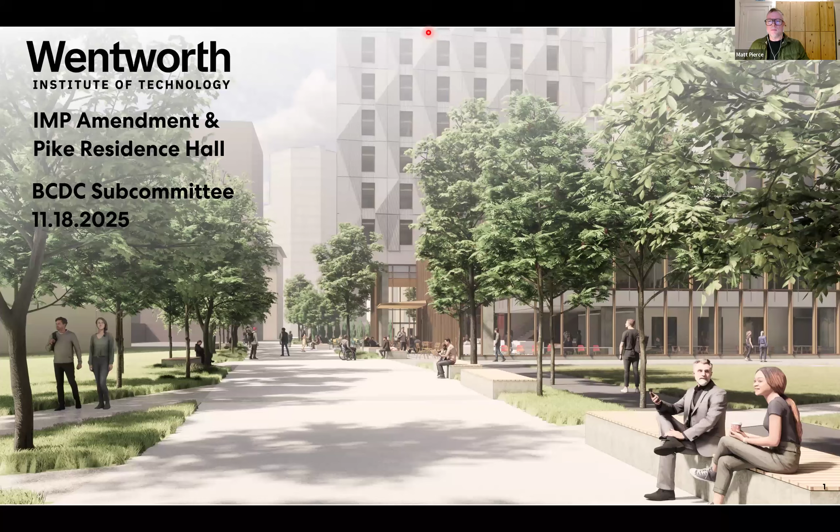Okay, thank you. Let me just pull up my screen here. Okay, everybody see this screen okay? Yes. Great. Well, thank you all for giving us your time this evening.

We're really excited to share some progress that we've made since the last time we met with some of you. I think we've been able to incorporate a lot of the discussion we had last time that was really fruitful, and I think has led to some good development in the project.

A brief overview of things we're going to touch on tonight. We'll start off with a little overview of the feedback from both BCDC and the planning staff to date and how we're responding. We also want to touch a little bit about overarchingly, what makes some of the things we're doing and proposing unique to Wentworth. We're also moving from a lot of diagrammatic massing views and overarching macro scale things into a lot more detail now. So we'll be focusing a lot more this evening on architecture and materials.

And I think to the progression of the presentation, there starts to become a little bit of a blend between some of the kind of IMP scale issues and then the specific development of the Pike Residence Hall and the associated landscape, which is a big part of the IMP amendment.

When we get to the landscape, we'll be talking about embracing the solar conditions within specifically the Western open space, and how we've evolved that design to be more flexible, also to be more coherent and simple in creating a singular gesture, creating a magnet for people in the West Courtyard. And again, really thinking about how what we are proposing is reflective of Wentworth and its unique culture.

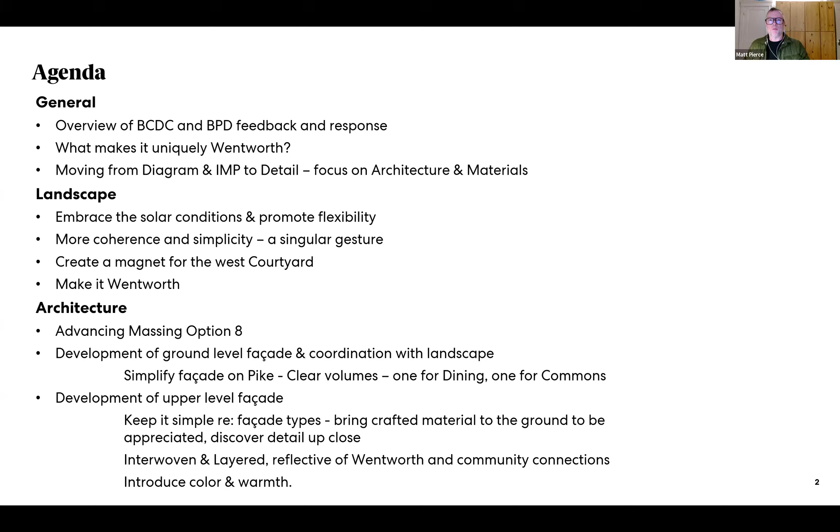So just some overview of feedback and discussion that we had at the last subcommittee meeting. I think in general, most commissioners were supportive of the massing direction we were moving in with option 8 and the site planning.

There was the bulk of the discussion around how to take the open space specifically on the west side of the building between the Pike Residence Hall and the Treehouse, and make that the best it can be as an open space going forward.

There were some questioning of the massing, mostly from Commissioner Lubenow and Commissioner Eastley to some degree. Commissioner Lubenow had asked if there were other options considered. Last time we showed a range of studies in the massing that were in a very narrow band of refinement, so we've got a little bit of additional context on that.

Commissioner Eastley had some questions about the cantilever of the building and the way the Pike facade steps in plan and the way that it met the Pike, that we will address.

She also had a comment about maybe calibrating the placement of trees to where there is more sun based on the shadows of the buildings, and maybe locating trees in places that will be shady as a result of those shadows, and that's something we have addressed.

Commissioner Manfredi had some questions around wind mitigation, specifically around the northeast corner of the building, which we'll talk about.

There was a lot of discussion around the character of that west open space, and I think it was a really rich conversation around how to be responsive to where the sun will be, where the shade will be based on the buildings. Could we be more creative in how we address that? Maybe that means less plants, maybe less natural landscape. And could it be fun? Also, could there be color within the landscape and within the building?

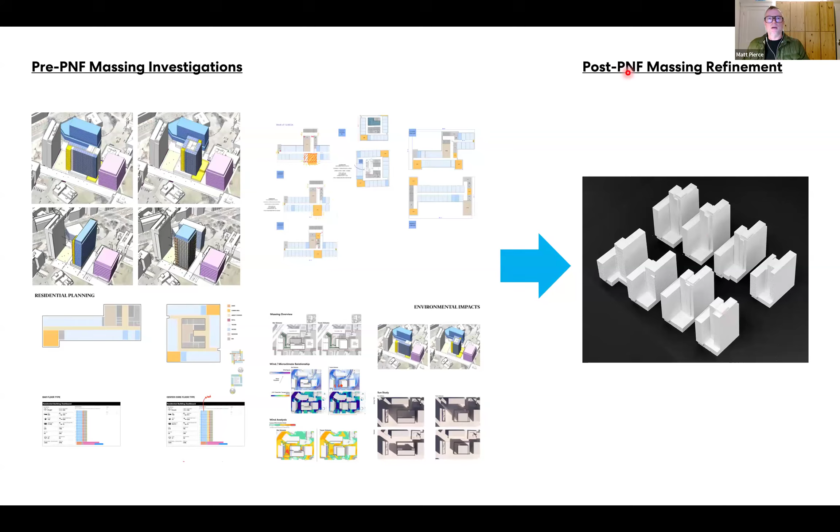What we shared with the commissioners present last time was the very detailed calibration of the massing that we did with planning staff between the first and second BCDC subcommittee meetings, which focused on trying to shorten the length of the building overall north to south, but also increase the difference in height between the offset bars. That was something we shared with the committee last time.

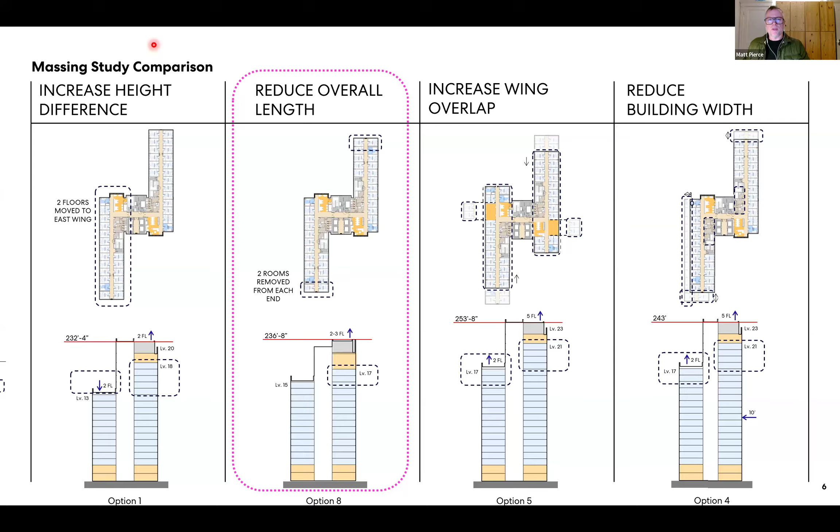This is a section and plan comparison of what was proposed in the PNF versus option 8 that we've been moving forward with, which adds some height to the eastern wing of the building, creating more hierarchy between those two pieces of the massing, and also shortens the building overall from north to south, which had good site impacts, opening up more ground plane on the north end of the building and potential for wind mitigation. So there were a lot of advantages to that.

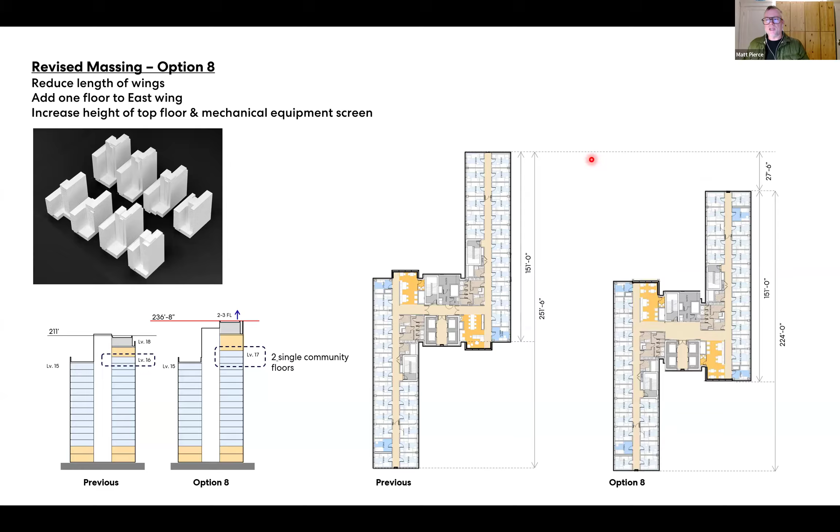That got us to this basic massing, which includes in the center the Pike Residence Hall with two bars that slide relative to one another in plan, with the easternmost bar being taller, increasing that height difference between them. The mass of the Huntington Academic Building has a lower mass aligned with Huntington Avenue, and then the upper mass of the building sets back, respecting the Avenue of the Arts guidelines.

This is also one way that massing could be realized in that future PIP project. Over to the right is the residence hall that would be on the center quad, and a couple other views looking northeast and northwest.

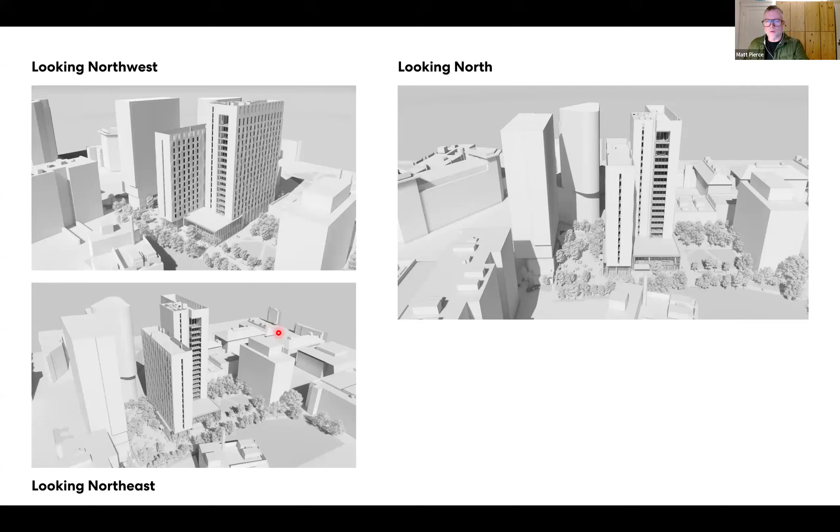So to talk about the development of the open space, I'll hand it over to Anthony and Mish.

Thank you, Matt. I'm going to walk through the open space adjustments we made to planning for the IMP amendment, and then we'll pass it on to Michelle Crawley to walk through the near-term landscape associated with the ADB Pike Residence Hall project.

There were some really wonderful comments, and I think it helped us unlock the significant potential for this to be a space of real significance, in the realm of landscape and campus planning in the city of Boston.

We think these 4 themes broadly represent the feedback from our last subcommittee meeting. There has been and continues to be significant discussion about the challenging environmental conditions in the west open space, particularly the limited sunlight in the northern portion and the anticipated northwest and southwest winds that can at times create an uncomfortable outdoor environment.

There was a really poignant comment from Commissioner Kim to try and create more coherence. She suggested a singular gesture, and Commissioner Garland encouraged us to develop a language for open space. Last, there was a lot of discussion about the open space having to do with creating interest and a sort of visual magnet.

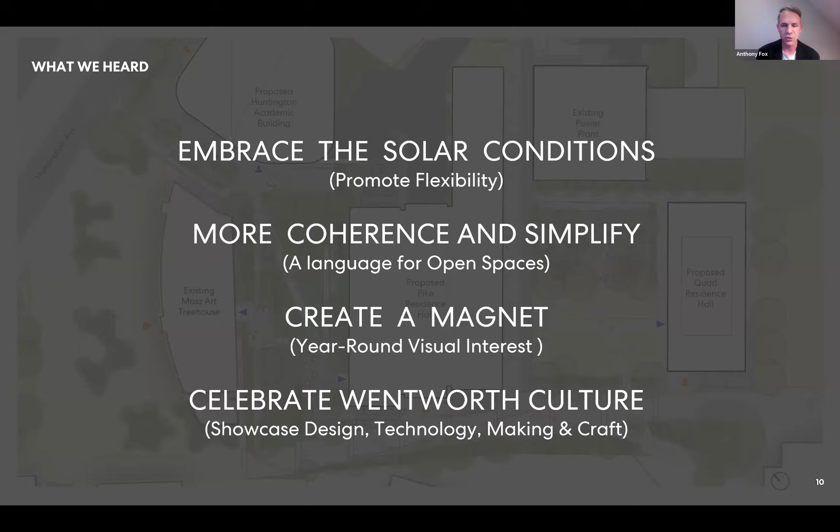The space is so interesting that it will draw people despite the shady conditions. And last, there was a desire for us to explore what can make this uniquely Wentworth, to celebrate the culture of craft, of art, and of making.

Commissioner Garland suggested that we again create this language of open spaces, and then Commissioner Eastley mentioned her recent trip to Rice, which has these compelling rooms held together with these incredible, memorable promenades.

In the meeting, I think we immediately were thinking about the West and Central Quads, which are these 3 distinct outdoor rooms that are within a language, but are spatially quite different.

This was an evolution that started with Stu Dawson and Sasaki, creating an open plaza in the 90s. That open square was translated into an idea for what is now a very iconic pavilion by Thomas Phifer with OJB, and then more recently with the evocative Sky Space by James Turrell. Together, they really create this wonderful, cohesive language of open space that is quite complementary to one another.

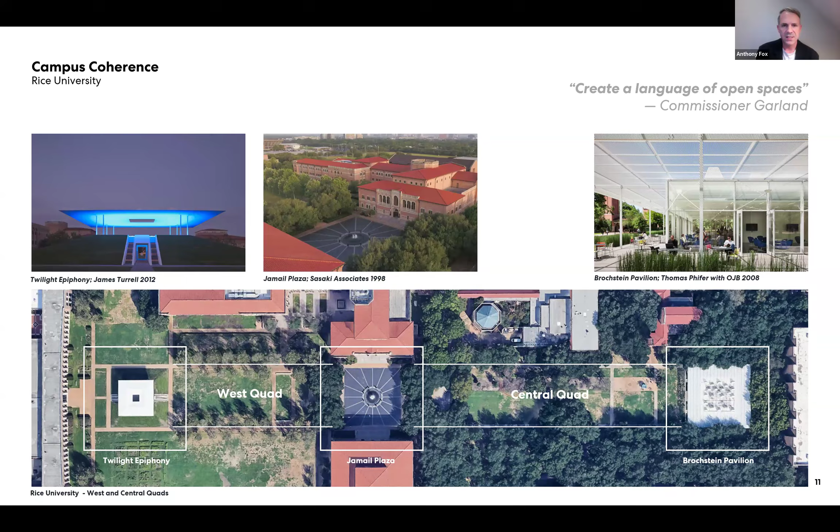And so we started to think about how we could begin to envision something like this for Wentworth, a series of open spaces that have similar spatial intentions, but take on complementary forms.

Then Commissioner Eastley made this really powerful suggestion for the tree canopy to follow the arc of the sun, which we thought was a great comment, because we have the opportunity for sun in the southern pockets of these spaces, so why not embrace that?

So we've moved trees in the southern portion of the spaces to allow sun to pour in as long as possible, and then we shifted the trees to the north side that's inherently a shady condition. This led us to an idea about trees shaping space, a grove on one end and a glade on the other.

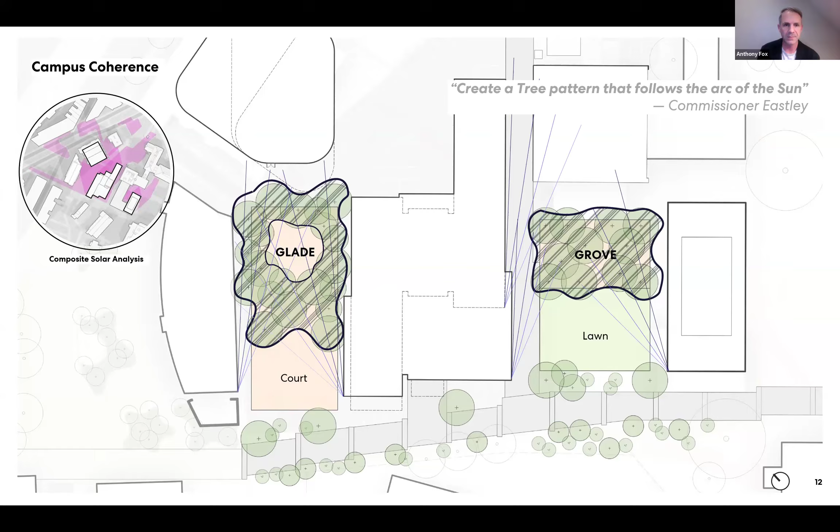In the east open space, the grove could act as an outdoor room, anchoring the north side of an open lawn. And at the western open space, we're really interested in an informal grove that opens up in the center, creating a kind of glade that marks a room open to the sky.

We've also been looking a lot at shade, and in response to the concerns about plant viability in these shaded conditions, we've looked closely at 2 precedent landscapes in New York that successfully embrace similarly challenging solar conditions. These are images of Teardrop Park, which Michael Van Valkenburgh referred to as having tremendous shade.

The space has a lawn, but even with the help of 3 mechanical heliostats to throw light into the courtyard, the lawn area only gets about 3.5 to 4 hours of direct sunlight, and the remainder of the park gets less than 3 hours of direct sunlight. And yet the plants are thriving.

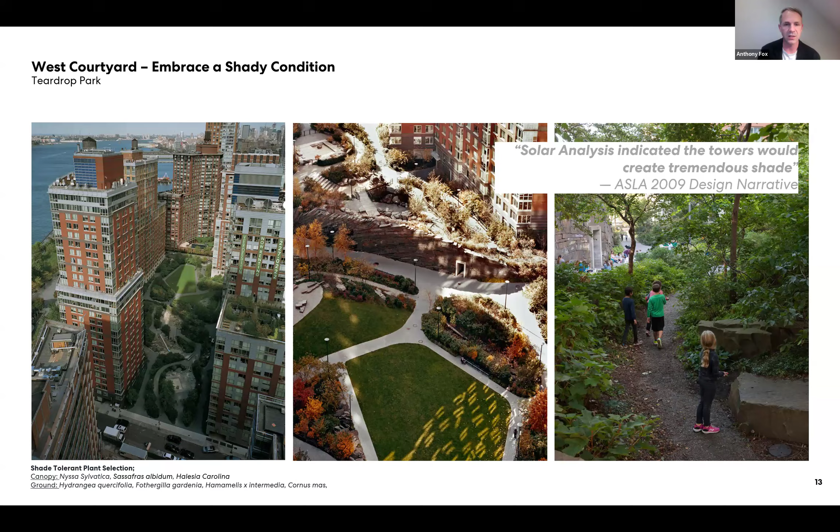So we've been looking really closely at plant selection, largely based on plants that grow naturally in deep woodland settings, like Nyssa, sassafras, Halesia, Fothergilla. I think there's a real opportunity for us to create a planted condition that can thrive.

Here again, a similar condition is the woodland flyover section of the High Line that receives less than 3.5 hours of direct sunlight. They relied on a beautifully curated palette of woodland plants, somewhat uncommon for an urban setting, including an understory of ferns, aronia, viburnum, beneath a canopy of birch, redbud, and magnolia. Together, these subcanopy woodland species really thrive in shaded conditions and create a rich, layered planting experience.

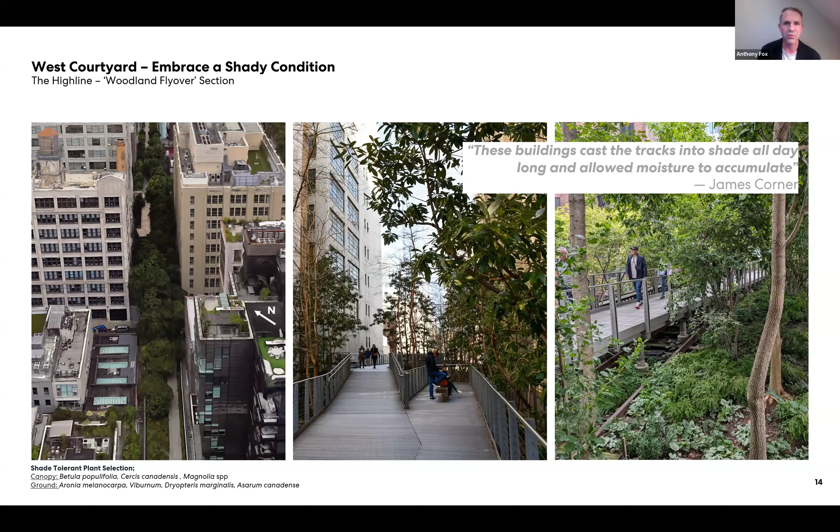So we really think that with a carefully selected palette of plants, we have confidence that both the trees and the ground plane plants can thrive in the shady conditions.

We've also looked a lot at wind mitigation. We're proposing a series of linear evergreen hedges at the north and south ends to help block the westerly winds that we know are going to be quite dominant here, along with marcescent tree species with an overhead canopy that will hold their leaves through the winter.

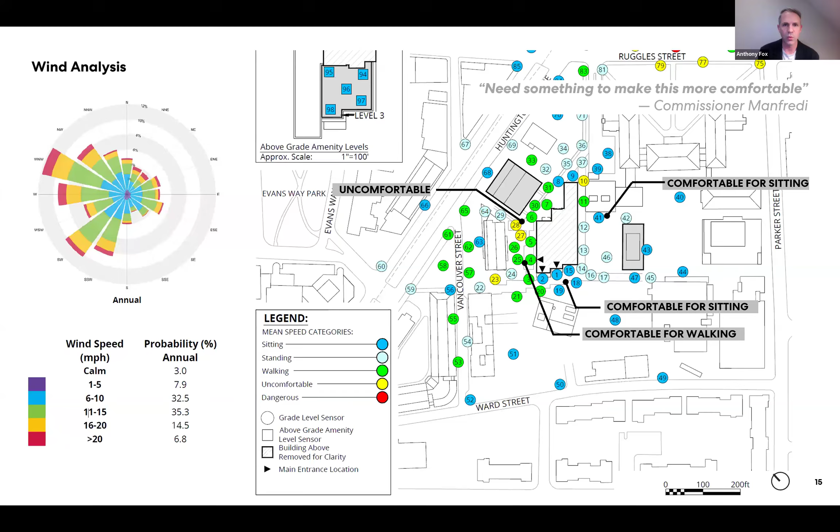While our wind consultants, RWDI, are still in the process of actually modeling, RWDI has updated their report to note that the tall hedges are expected to help reduce the intensity of accelerating winds, particularly from the west and southwest. We're anticipating this change will really aid in creating a more comfortable space for gathering.

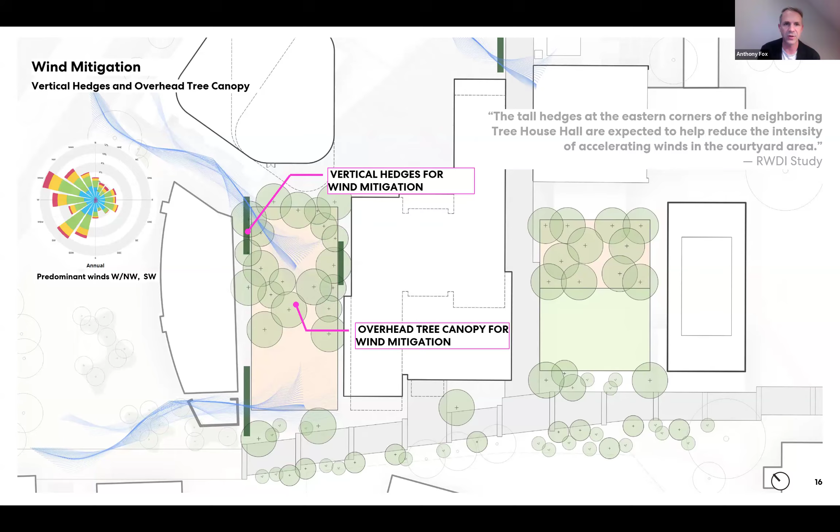We've also thought a lot about Commissioner Kim's comment to create a more coherent, perhaps a singular gesture. In working with planning staff, we've also recognized that this western open space is not a very large area, and that the multiple pedestrian paths to connect desire lines were sort of chopping the space up.

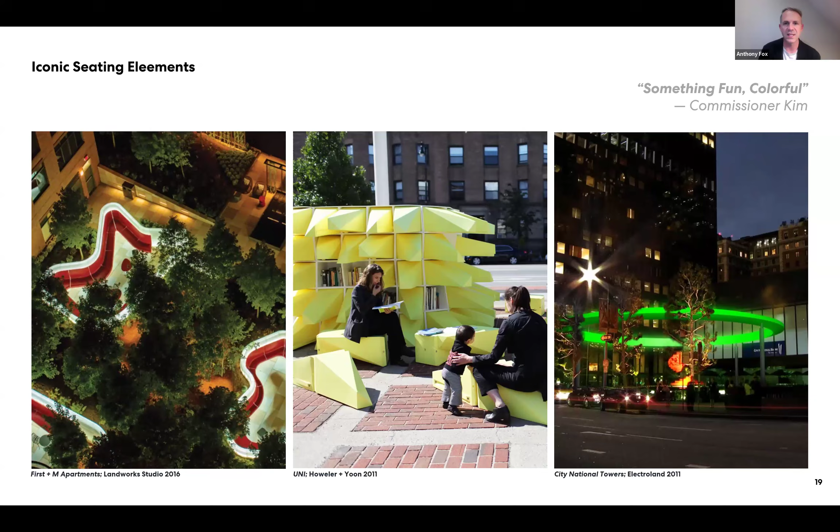There was also a comment about overhead canopies, and again this desire for a singular gesture. We think that creating a large, iconic circular seating area could help create this visual magnet and help shape a secondary space within the western courtyard.

Last, we've also been thinking a lot about the culture of Wentworth and its legacy and identity around craft and making. We've talked to faculty, and we see a real opportunity to use the open space as a platform for making and the display of student-led projects.

From temporary pavilions to construction mock-ups, there's a real opportunity to put the kind of academic learning on display and for students to take ownership of their space. This is their backyard, and with admissions as part of the building program, it's also, in many ways, a front door, an opportunity for first impressions about the culture of Wentworth.

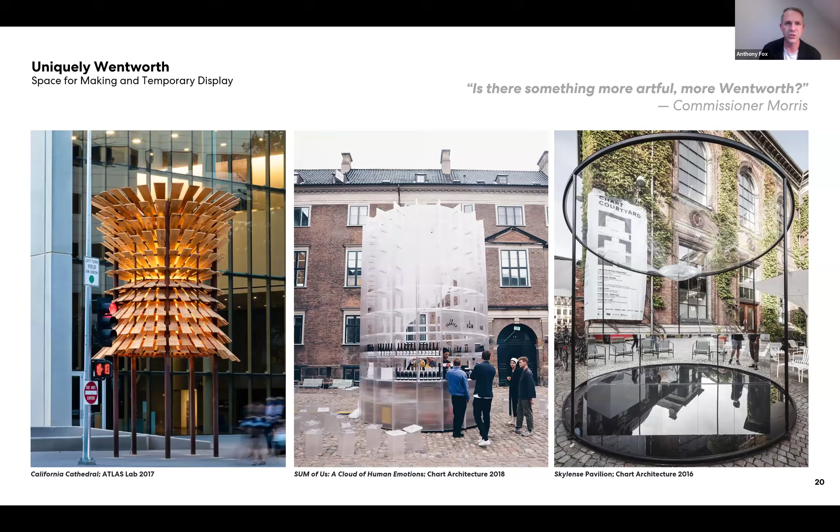In response to comments, we adjusted sidewalks, adding additional sidewalks to follow pedestrian desire lines. We added a new terrace outside of Mass Art to allow for more connectivity and engagement with Mass Art, and we shifted social terraces south to capture more sunlight.

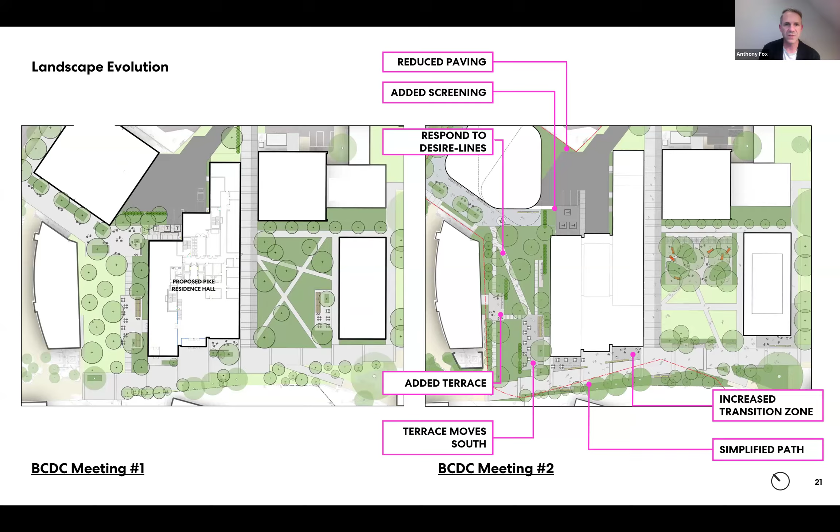After the feedback from the last meeting, we made a number of really big adjustments and have completely redesigned the West open space entirely. We're really excited to reposition the idea from a garden to a courtyard that is flexible, active, and vibrant year-round.

We'll enlarge this plan shortly, but broadly in the proposed changes, we proposed the south ends of the open spaces be open to the sun, and in the west open space created a broad, flexible stone dust surface that allows for more seating and more free choice to move chairs and tables around.

You can also see we've adjusted the building massing, which Matt will go through in more detail, to address comments about the shear wall and to more directly connect and engage the east and west directions. Along the pike, we've calibrated the active seating areas to create what we think will be a really comfortable space, while shifting the building massing so there's a more optimized relationship to the pike.

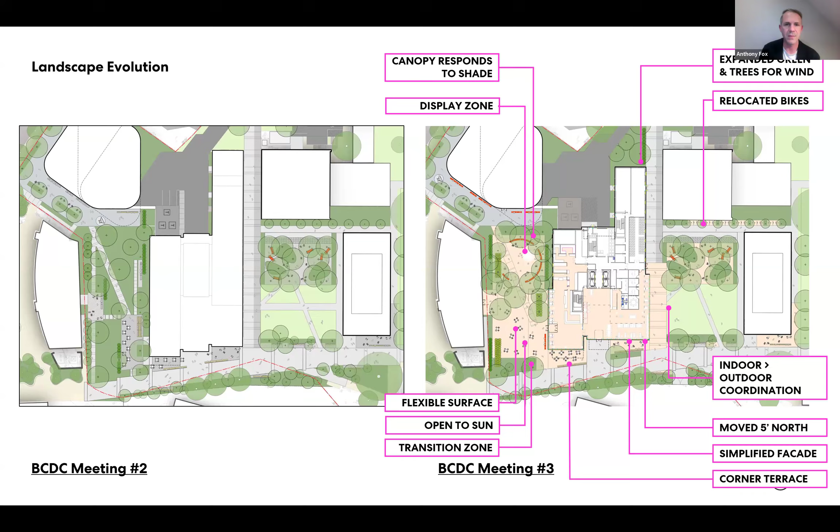Last, to the north, we've reduced the amount of pavement and expanded planting areas. Zooming out, we've also refined the northern portion of the project area, reducing pavement, expanding planting and tree canopy, and adjusting the path geometry to create clear, more direct circulation.

Zooming back in for a little more detail, we want to highlight the updates to the building massing, which Matt will walk through. We've focused on reshaping the ground floor to create greater visual porosity and stronger physical connections to both the east and west open spaces, significantly improving the relationship between indoors and outdoors.

We've also simplified the south facade at ground level while maintaining active seating areas that engage directly with the pike. You'll also notice we've completely re-envisioned the western open space to create a more cohesive environment, one that emphasizes flexibility, framed with this large stone dust surface and shade-tolerant perennial plantings.

At the northern end of that west courtyard, we're envisioning a loose, informal grove of trees that opens at its center to create a welcoming clearing, framed by a concept for a substantial circular bench that both activates the glade and defines its edges. We see this as an ideal location for displaying student-led work, bringing energy and creativity directly into the heart of the landscape.

Last, to the east, we're excited about the opportunity to create a complementary open space that is larger, sunnier, and defined by a broad open lawn for informal activity, anchored by a social grove to the north. As we shared at the last meeting, this eastern space has the potential to support a really wide range of programming, from quiet study to performances that spill out onto the lawn, accommodating a full range of student life activities.

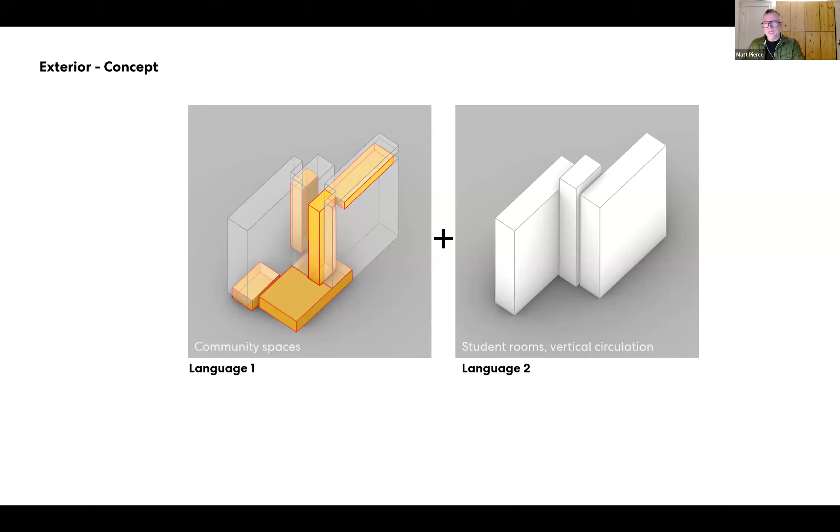There are fundamentally two different building material languages. The orange represents the very transparent student common spaces, and the white on the right are the more solid student rooms. Just to keep it in context, this is going to be a passive house building.

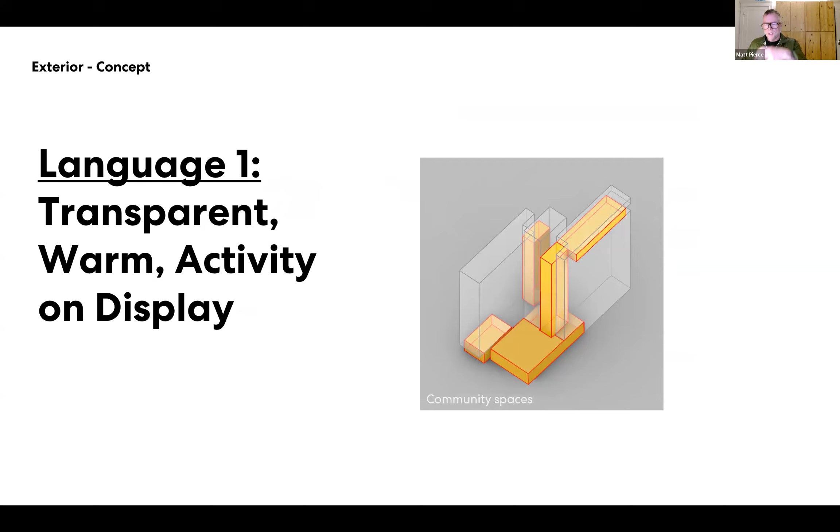That really informs a lot of the approaches we take to how we detail the envelope and the way the building pushes in and pushes out. So those common spaces are really about transmitting the warmth of the interior to the exterior, and then cladding the residential volumes with a facade that's reflective of the community makeup, but also the sculptural and finely crafted nature of concrete.

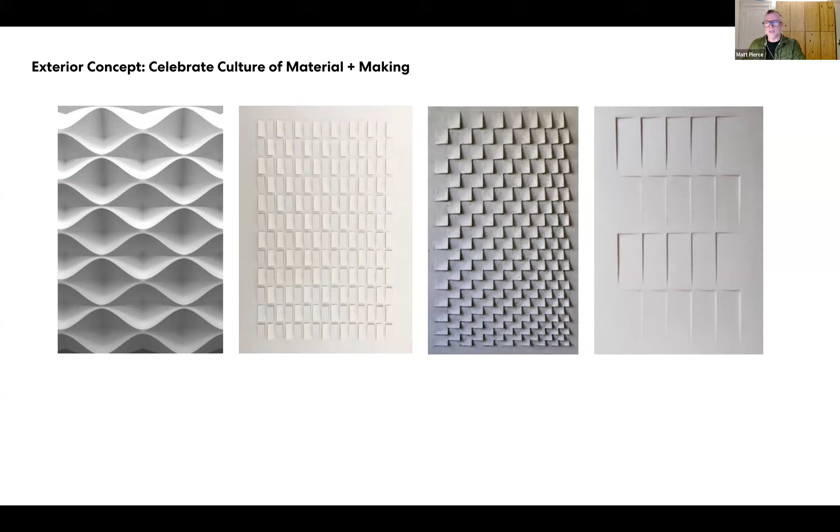So we've been looking a lot at how to incorporate different types of relief that could be really dynamic and responsive to the sun moving around the sky, and create a really dynamic presence on the skyline.

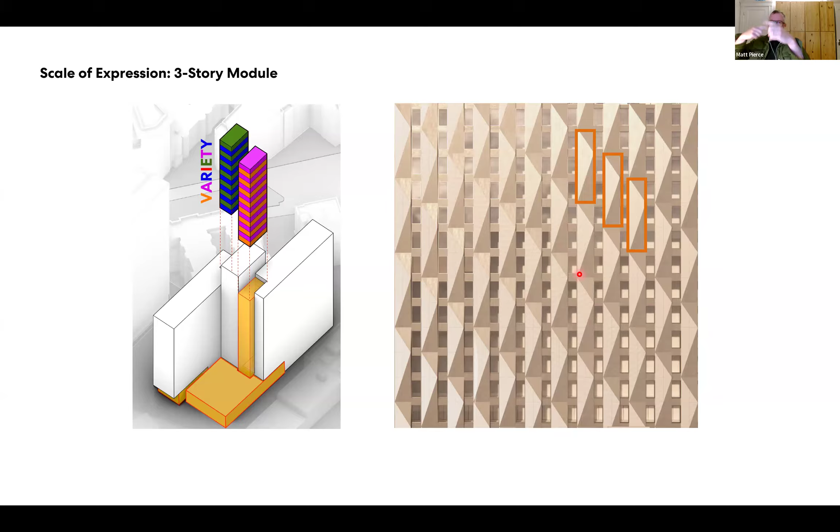Again, reflecting this idea of the alternating types of social spaces in the building that induce a sort of movement up and down to create different scales of community connections, and how that is reflected in the exterior facade in a sort of interwoven, continually overlapping vertical connection between the floors.

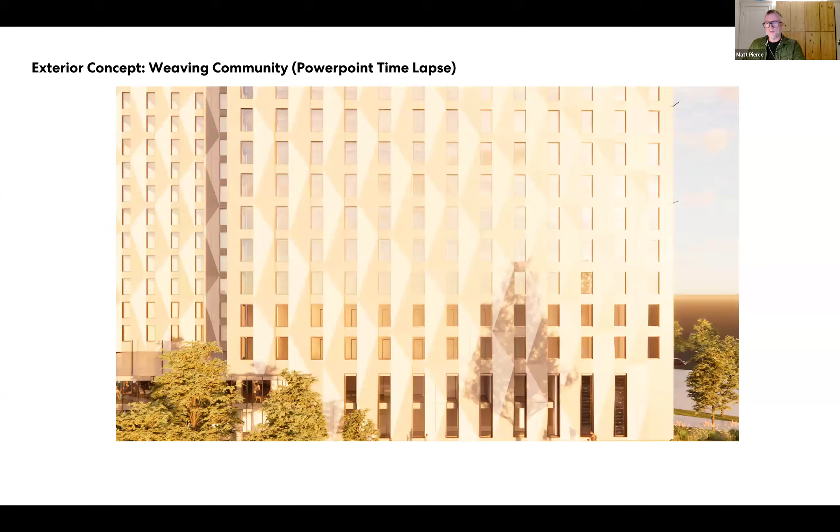If we can get this to play here... there we go. An animation just kind of looking again at the way the relief in the building can be responsive to the movement of the sun and shadows, and create a really sophisticated but dynamic facade.

Some references, on the left-hand side, to the campus buildings CEIS and Beatty Hall, and some examples of what we're looking at in a narrow band of concrete tone, all in the very light end of the spectrum. There are a couple local buildings here: Stuart Street, being relatively recent, a very light, slightly warm toned concrete, and Hult Hall at Cambridge Crossing, the EF Residence Hall, which also has a nice, very light gray tone to it.

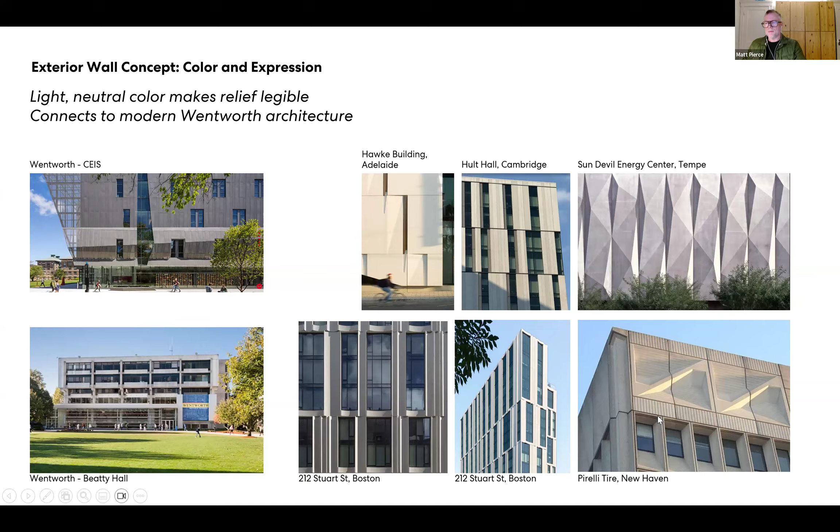There's also this Australian building that we quite like, which has a very delicate textural faceting to it, and also a warmth to the color. And of course, many are familiar with the Pirelli tire building, which has a very sculptural texture to it as well.

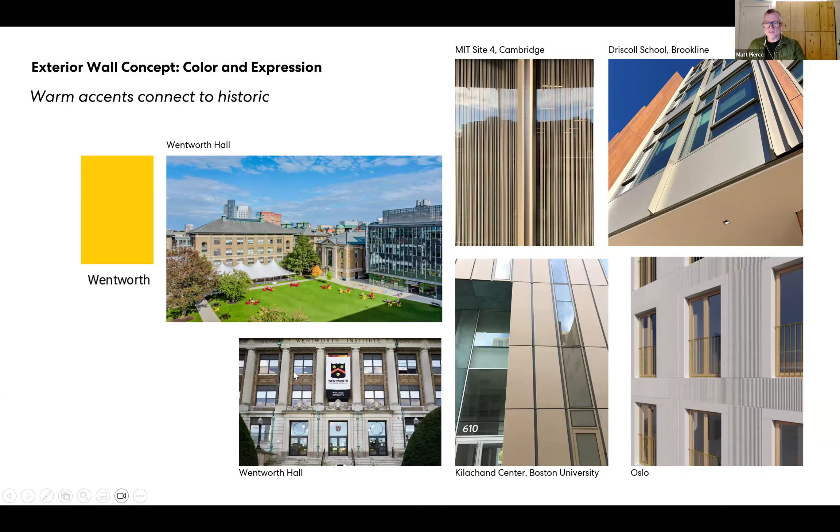But also, talking with planning staff about introducing some color and warmth into the building, and really looking at how that could be a secondary element that takes the warmth of the interior and brings it to the exterior a bit. It also ties in with some of the historic buildings, with their warm toned brick and these more sculptural detail elements within the historic buildings.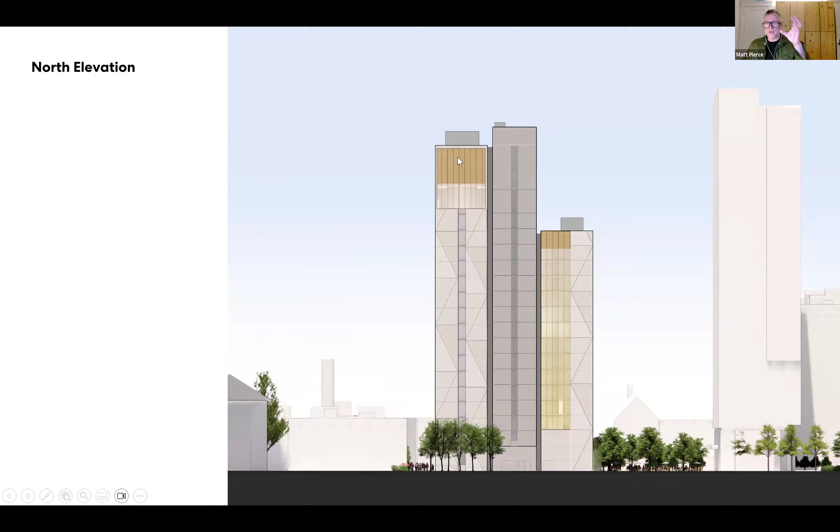The north-facing facade culminates at the top of the taller tower on the east side, with a special student commons and multifunction space that accentuates the top of the building. Then coming back around to the side of the building facing the treehouse and courtyard, that wing is lower in respect to that open space.

Zooming in on the typical module of the precast facade, we tried to make the windows of the rooms as large as possible within the passive house design factors, while also creating textural contrast and three-dimensional relief in the panels, without making them too thick, to keep the volume of concrete on the lower end with respect to embodied carbon.

This is an elevation looking at the north-south connector between Ruggles and the Pike. On the left-hand side is the two-story commons and admission space that's very transparent, looking out to that future east open space. Moving to the right, the ground floor has the bike room, and the second floor has resident director apartments in those windows.

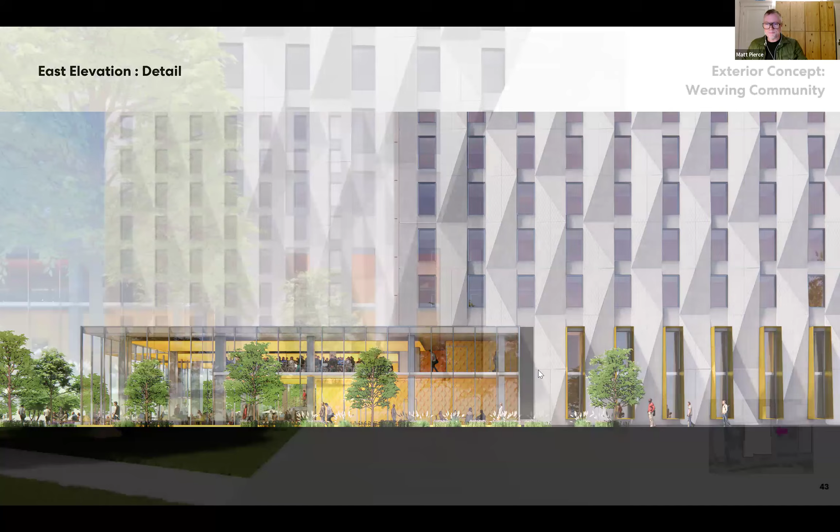As we look at how that material comes to the ground, we want to make this a beautiful textural element, something appreciated at the macro level on the skyline of the city, but also something tactile that people can walk up to and experience, discovering a greater level of detail that might be surprising up close.

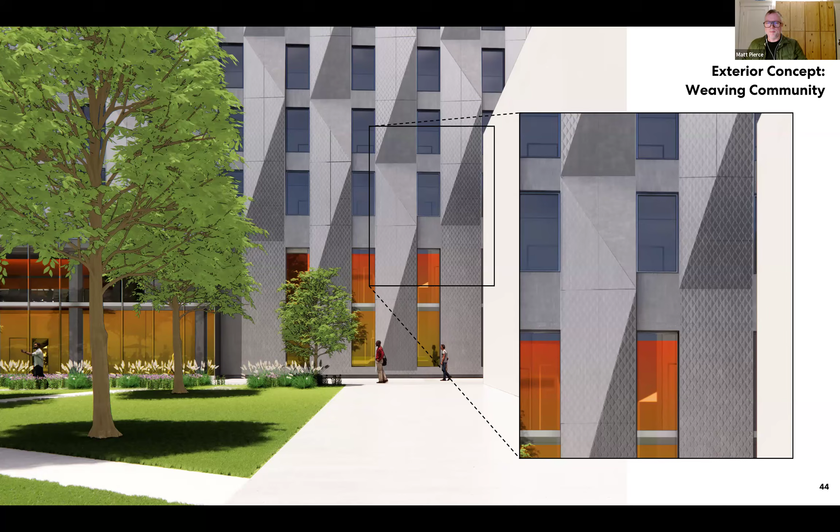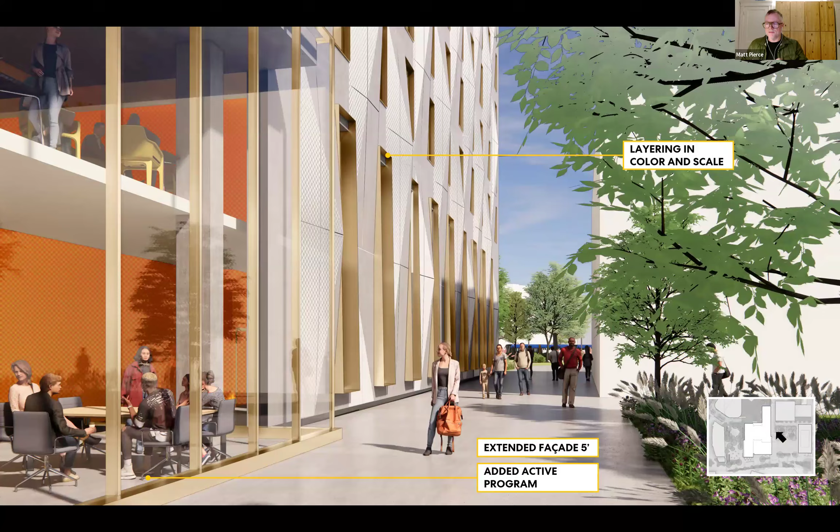Last time, many comments were based on the kind of graphics we had, which were really massing-based and diagrammatic. Now we're moving on to much more illustrative, hopefully immersive and experiential views to really communicate both the building architecture and the landscape that Anthony and Mish have talked about.

This is a view of the north-south connector looking north towards Ruggles Street. We're looking at a metallic color incorporated into the curtain wall and into the liners and jamb projections of the first and second floor on the east and west sides, as a way of interweaving with the greater theme of the building, weaving those materials together.

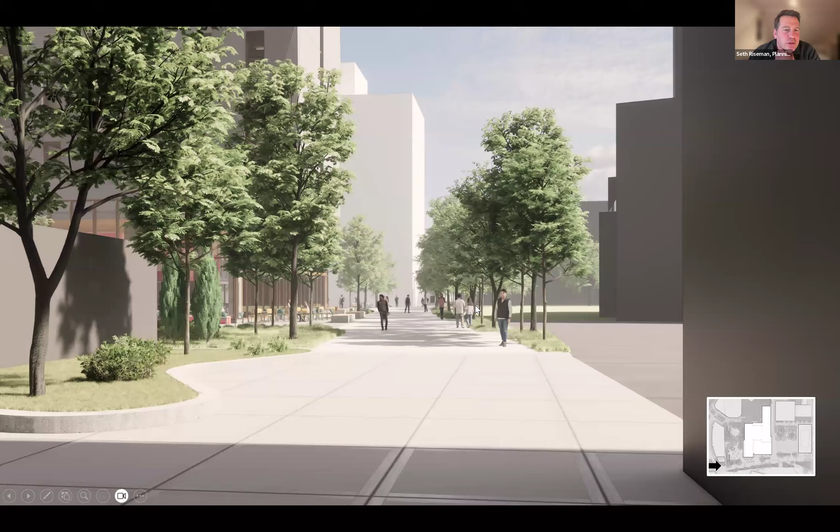You're a little over time here, so I know this is the good stuff, but try to keep it going. Yeah, sure.

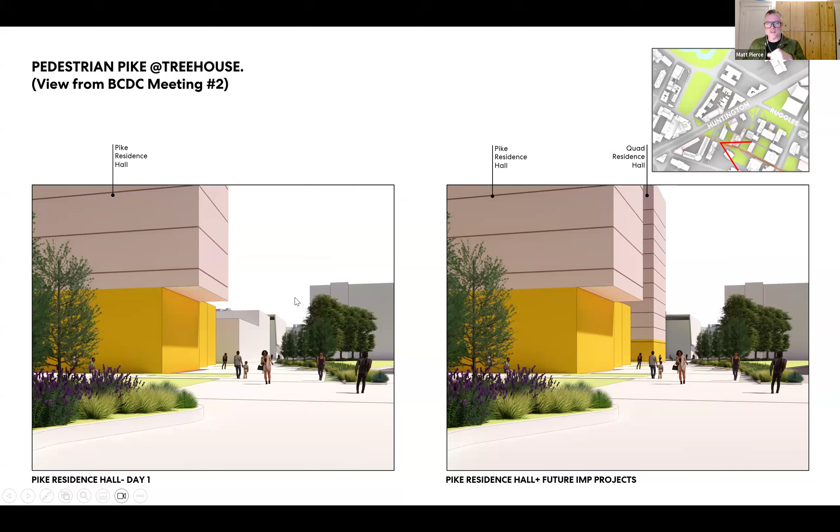So we'll do a quick walk around the building scene by scene. We're right next to the treehouse to our left, Huntington is right behind us, and we're just entering the Pike. This was a character view, and in context of previous comments about the cantilever and stepped nature of the Pike facade, this is a more detailed representation of that.

The west open space that Anthony and Mish were describing is over here to the left, with the dining transparent volume over here, and beyond it a singular volume for the student commons.

Swinging around, looking north into that open space, there's a clearing closer to the Pike with an opening in the tree canopy and more sun based on the shadows from the buildings, while towards the back there's more density of planting in that shady area. This responds to great dialogue we had last time with commissioners, also extending the dining volume into the open space to create a break in the plane of the wall, while clearly articulating the volume of the dining, which is a two-story, quite transparent space.

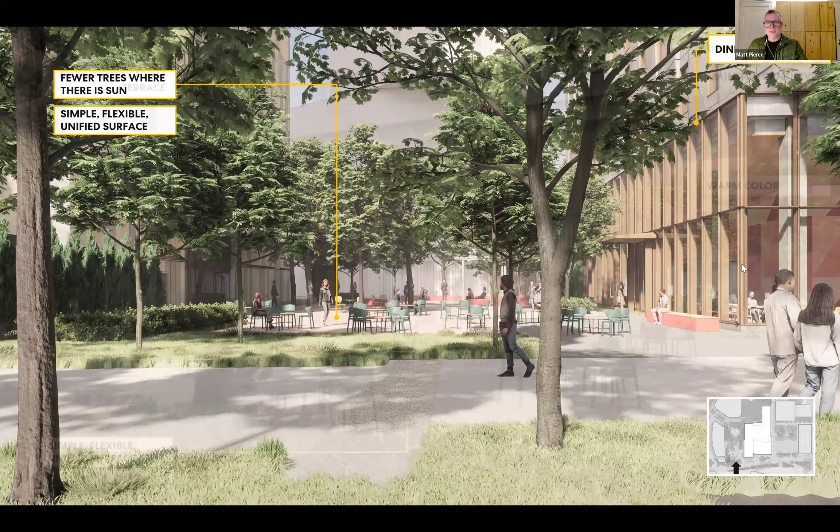Taking a detailed view within that west open space, we look at the flexible ground plane Anthony was describing, with a lot of flexibility for seating, the entry to the dining activating that space, and a warm color incorporated into the curtain wall making its way up into the residential windows above. We've maintained the cantilever discussed last time, and hopefully it feels a little more integrated now with this higher level of representation of the building.

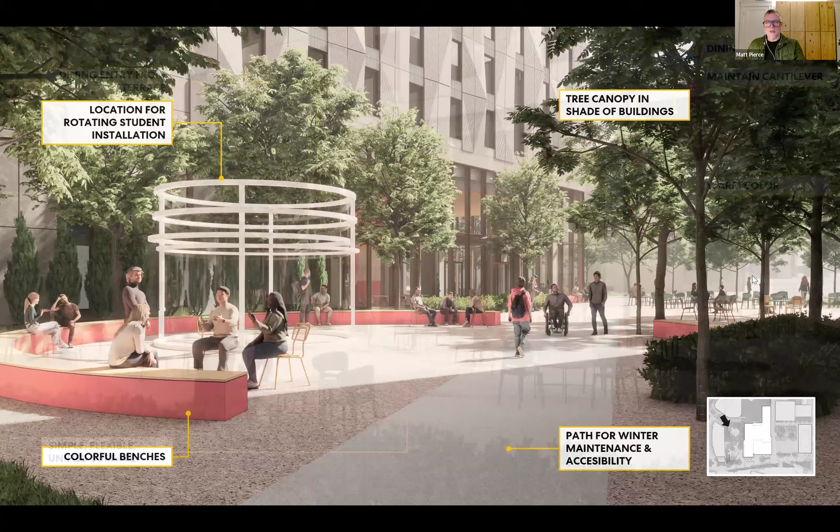And looking from Huntington Avenue, looking south to the Pike. This is where Anthony was describing this moment in the landscape, in that kind of grove of trees. This is not a permanent structure, but this is a stand-in for that place for student installation.

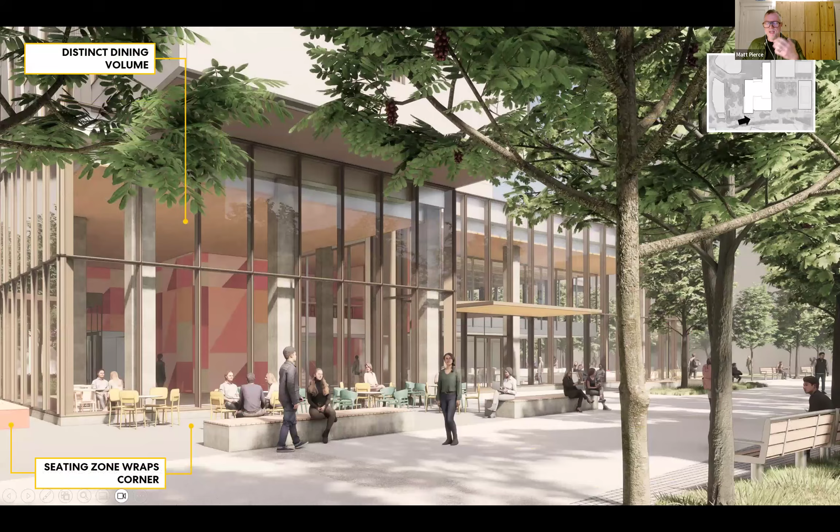So you imagine many architecture schools and design schools have a culture of making physical things, whether it's a material mock-up or testing something, and that could become part of the identity of Wentworth and a way of activating the space on a rotating basis.

So coming in with the Pike, I think we've had a great conversation with staff and commissioners that really calibrates the relationship between the thoroughfare where you walk through the Pike and this interstitial zone between the walking zone and the building, to really make an active transition zone and activate the edge of the Pike, and also that interior-exterior relationship between the dining and the student commons.

So this is the entry to the student commons with a simplified volume. That's just that whole volume is the commons. I think it's much more clear.

And again, looking back, this is what we were looking at last time, and the way we simplified the volume, incorporated materials, that kind of warmth on the exterior and interior, the scale of the transition zone between the walking part of the Pike and the commons.

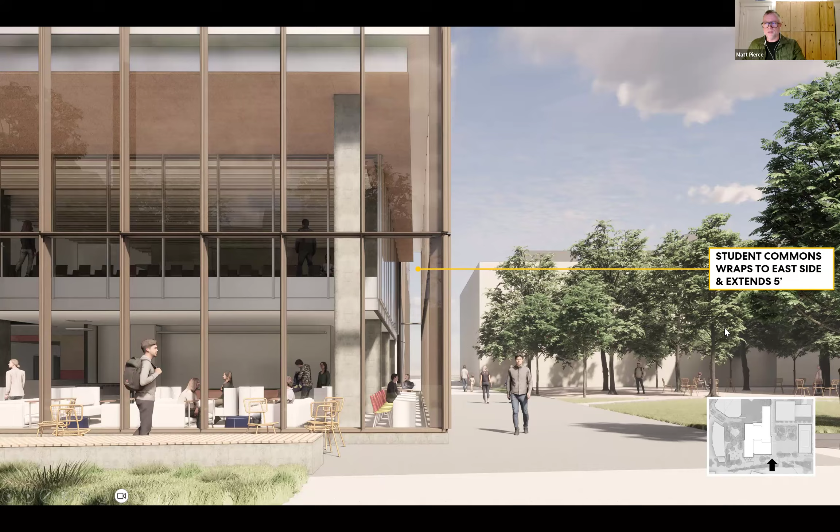The view back towards Ruggles with this projection of the lower two stories out to the east, creating a really nice zone for both circulation and seating along the window line there, which will help activate that connection and the relationship between the east side of the commons and the open space to the east, those working together.

And this one, looking from the inside out, to try to understand - we were really focused on that transparency and the activity both inside and outside, and the layering from inside the building to this interstitial space to the walking zone of the Pike. This looking back towards Huntington Avenue.

And then finally a view back from Museum Road on Huntington Avenue with the massing and material of Pike residence hall on the left, and obviously the treehouse to the right. And that concludes our presentation.

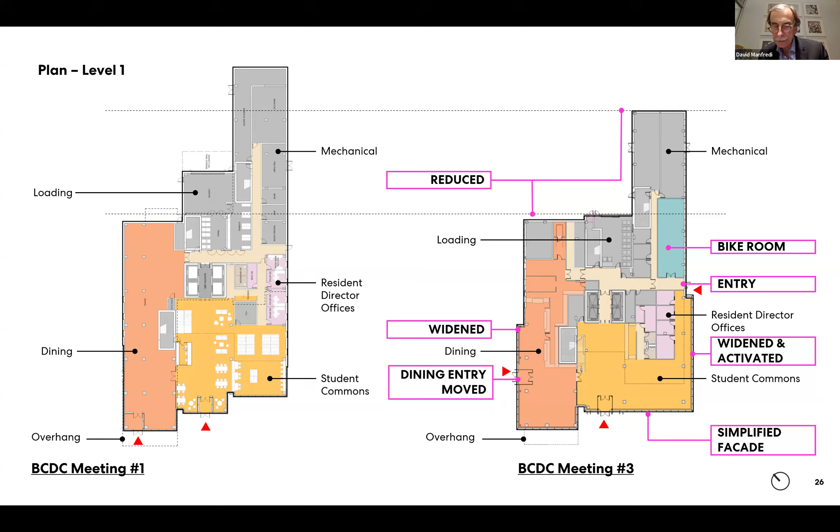I really appreciate the way you re-planned the whole ground floor in order to push the enclosed spaces away from the perimeter and pull the common spaces out to the perimeter, letting the open space on the west flow through the base of the building to the future open space on the east. I think it'll be really, really successful. I think the whole plan is really successful at the ground level.

This is a really nice story in this drawing you have on the screen right now, and the idea that the south, west, and east walls kind of disappear, and the ground plane flows through with these peninsulas of activity that exist inside the building. I think that's all really nice. I congratulate you, you made a lot of progress here.

I think reminding us of a set of moves or studies you made about a month ago was a really good idea. The building has gotten significantly shorter in the north-south direction, and one of my greatest fears was that this was going to be a very long wall for a pedestrian walking on the Pike, east to west especially, almost a barrier. I think sliding the legs closer together, you reduced in the last move 25 feet, and overall reduced significantly more than that.

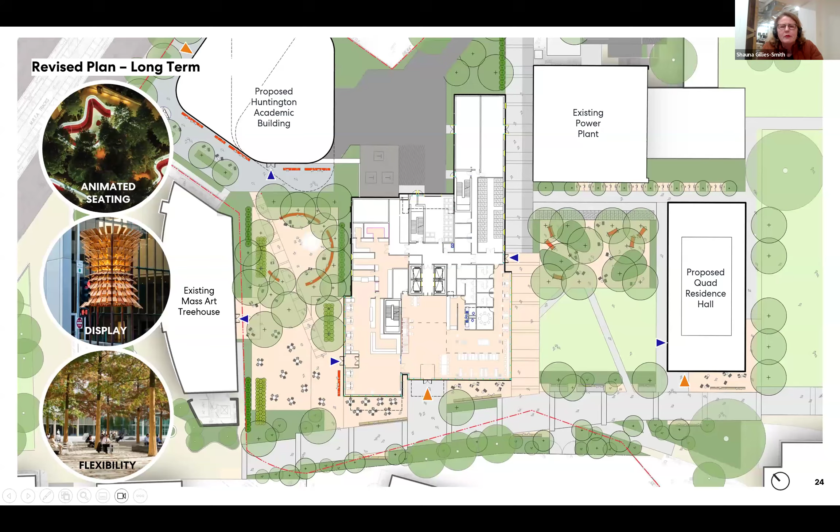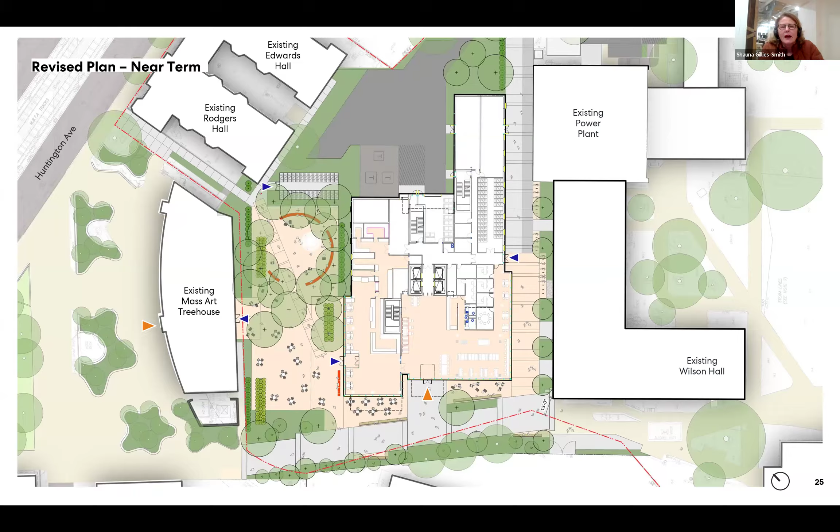So I did actually, I very much like these trees - this is just the temporary condition, it can't be before the new dorm comes, but I very much liked these trees and these gardens kind of stepping through. And then when we go back to the overall one that goes all the way to Ruggles, I was hoping that connection could go further. It doesn't have to be exactly the same thing, but this feels like it's still falling apart - as soon as you get into it, you're kind of pulled in a bunch of different directions, it's a little bit jumbly. If there could be this elegant connection that continues all the way through to Ruggles in some way, even if it's pulling you over to the other side in front of Wentworth Hall, but something that really takes you the whole way to Ruggles instead of just part way.

But overall, I think it's really an exciting project. Congratulations. Great. Thank you. Thank you, Shauna.

Since we have a little bit of time, I wanted to follow up on something that David mentioned. It was on my notes as well, and that is just about looking at each of the elevations of the Pike Res Hall, if we can.

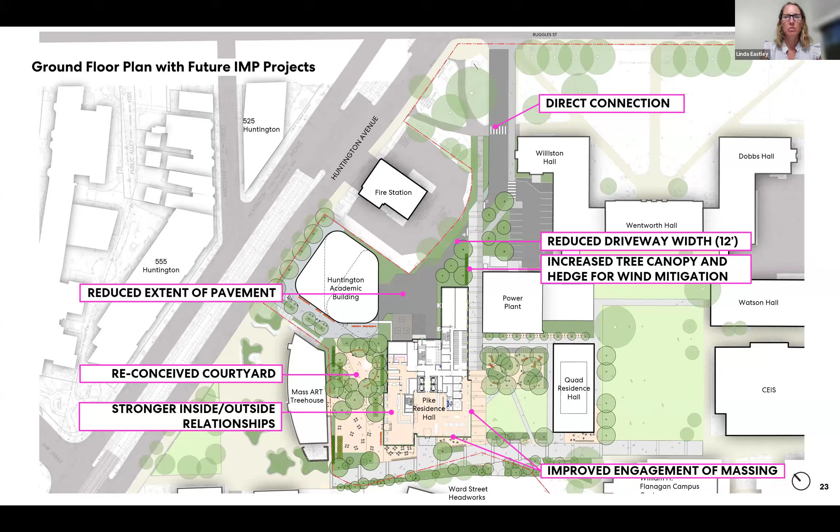You guys have really inspired the poetry of this today for me. I'm thinking about your project now in terms of craft and invention, and the idea that nothing in this construct is static. So craft and invention is impacting the way shadows and movement are coming around the building with the sun, and how that's happening with the landscape. I really like the idea that it's syncing with the Wentworth mission.

But I wanted to get a better understanding of how the different facades either express the sun arc or are being designed, or how the facets are changing. I think the facets change depending on which elevations we're looking at, and I'm curious about the story behind that.

Sure, I can explain that. Also to some of David's comments, about the variety or lack of variety in the windows, Commissioner Manfredi, all the rooms, basically all but one per floor or per wing, are doubles, laid out in a pretty specific way, with furniture on either side of the window. We've looked at making the overall window-to-wall ratio work with the passive house requirements, so proportionally inside the room the windows are actually fairly large for the size of the room, but they are very regular.

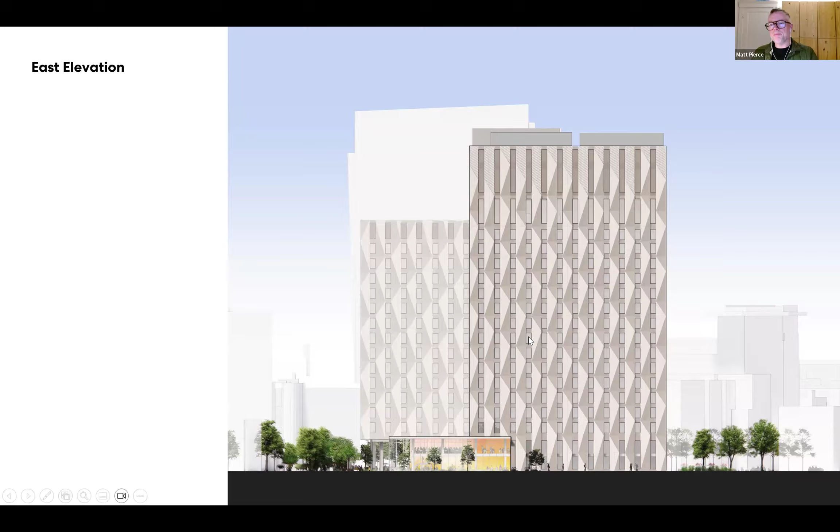So we really focused on the articulation of this, this kind of faceted surface that connects and creates different readings depending on how you look at it.

On the east and west elevations, you get the raking sun of the early morning that will really make those shadows come alive on this face, and also on the tower or wing beyond. Then in the afternoon, these facades will calm down since they won't be getting direct sunlight, but the west-facing ones will.

But then the ends of the buildings, which don't have windows in quite the same way—this is the end of the corridor, facing towards the pike, with the window at the end of the corridor. So at every corridor, you can see out both ends of the building on the residential floors, but there are no windows in the rooms on the ends.

The pattern, this overlapping three-floor weaving pattern, gets simplified on the end. It does wrap the corner, and the same three-story module turns the corner, but becomes simplified as a way of creating contrast with some smoothness—a layer of interlacing of a more subtle pattern. So when you look at the corner, you see a very textural face on one side and a contrasting smoother face, but it still has that same triangulation moving between them.

Each wing has a series of lounges. The east wing lounges face south towards the pike, so that's the warm color making its way up here. That's where, as I was describing, we're really thinking of the inner warmth transmitted through lighting and through the interior materials.

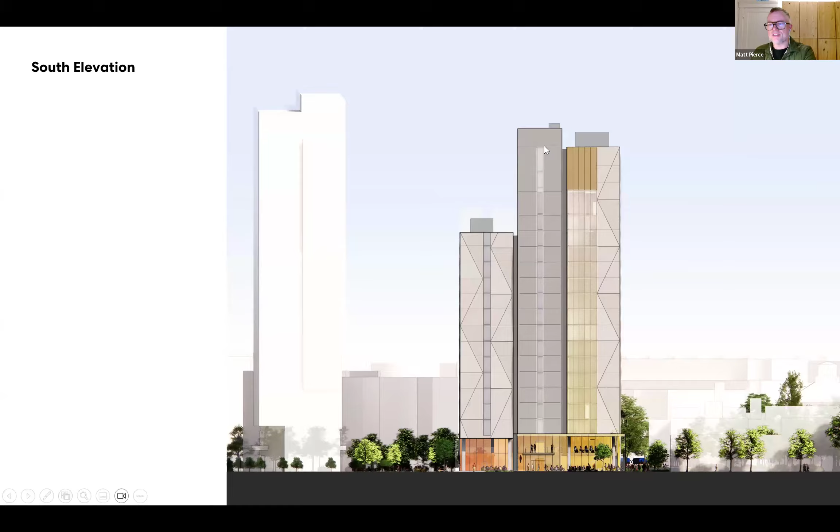And then there is the center volume here, which is the simpler one, which is really the core that has the stairs and the elevators, but facing south, there is a window in the elevator lobby there as well.

So when you come around to the north side, it's the same kind of smoother, but still kind of triangulated end. But then we cap that off, the taller portion, with this very tall curtain wall at the student commons and event space at the top.

And then we're concealing the mechanical equipment at the top of the building, so we've extended the facade up to conceal that. So this is an opaque area, but we're trying to create the same kind of unified system, so it feels like one gesture that's partially transparent and partially opaque.

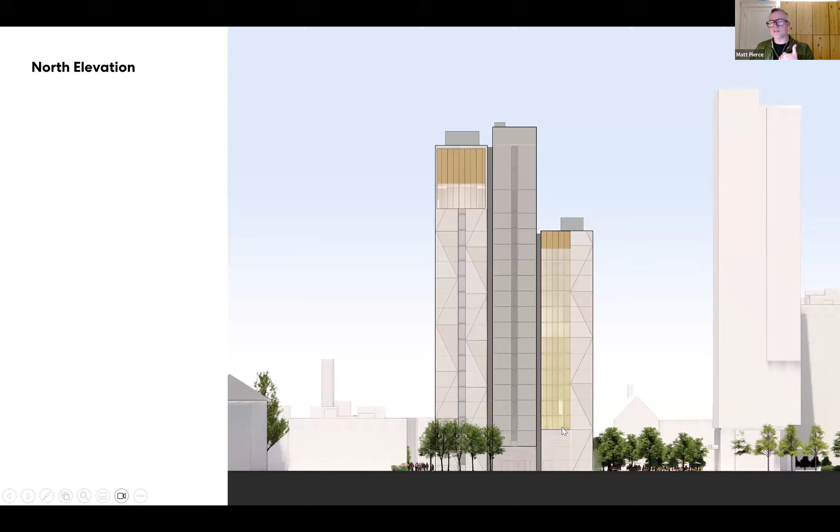And again, this is the corresponding typical floor level lounges that face the north side as well. So the long sides have the texture and they get the raking sun, the low morning and low afternoon sun, and the ends get the contrasting, smoother treatment.

And then as we zoom in on the actual panels, we've been talking to multiple manufacturers and fabricators, really understanding their capabilities in terms of relief, what kind of resolution or how big the elements have to be to get the concrete to fill it consistently. But really looking at that as a very repetitive, but finely calibrated detail that makes its way around the building.

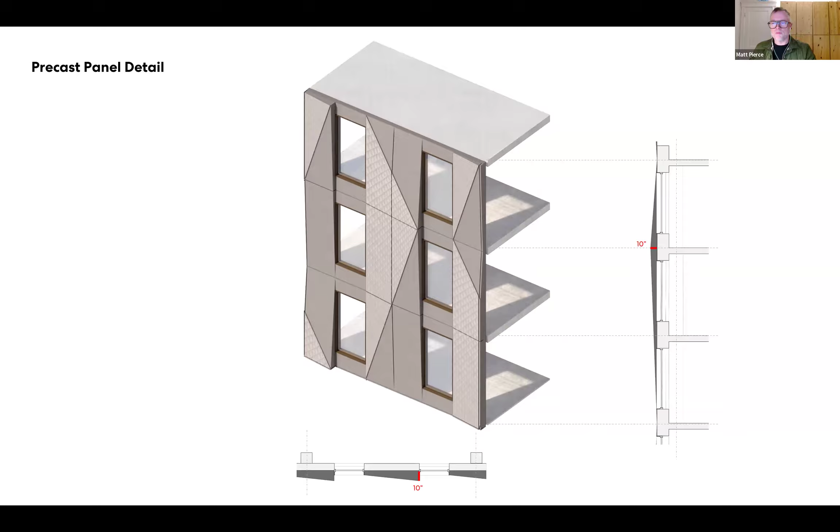Yeah, that's really helpful. Thanks for walking us around the building.

Okay, so essentially the east and west facades that have the raking light, or have the opportunities for raking light, are the ones that are most faceted.

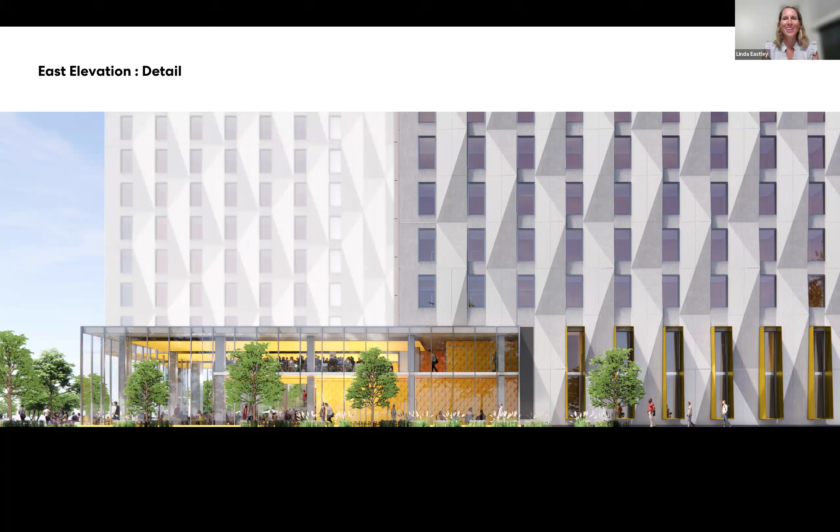So I'm curious about the north-ish and south-ish facades and how those would be experienced at night, because I think what's going to be interesting is that the faceted sides, east and west, are going to have a lot of daylight interest, and then they're going to glow from the inside at night because students are going to be in the rooms and using those rooms and lights.

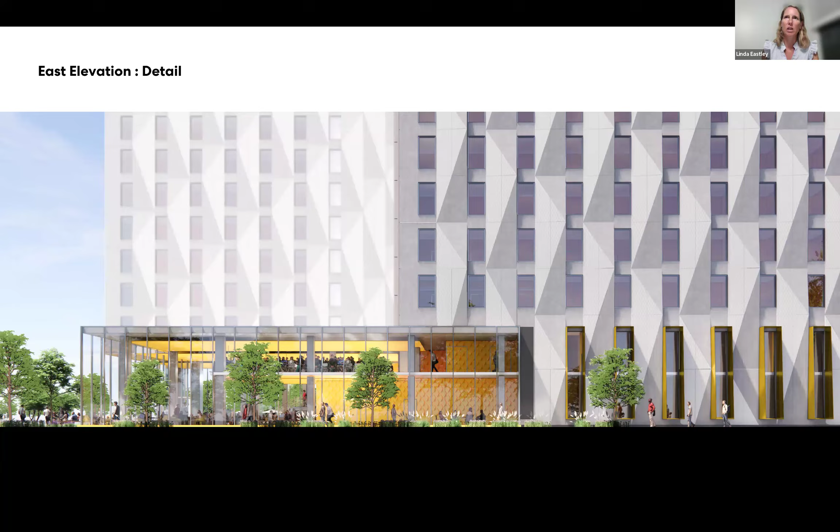But I guess I'm still trying to understand what will be the experience on the north and south, since you have some spaces like the common spaces highlighted, and those will have an interesting interior glow at night, but then there are other parts of those facades that will be quite blank and dark.

Yeah, so we didn't highlight this too much. We're kind of sticking at the ground level experience here. You can see this is the ceiling, and we're still working on many of the interior elements, both on the ground floor and up above.

But you can see this is one of the student commons that faces south towards the pike, where we're looking at a combination of a solid portion of the ceiling that then gets peeled back and painted a color to get a little bit more height that we can also illuminate.

And that'll be something you'll see both on the side facing the pike and also facing north. One of the ideas we're looking at is when you see that transparency in the light, that same idea of these alternating amenity or common spaces, that there's a different pair of types every other floor, so it's a sort of A-B pattern. It could also be reflected in the lighting that you see through the glass, so it would make its way every other floor, alternating in a way that's also reflective of the variety happening inside.

Let's see if there's, you can see it over here too. This view from into the landscape on the east side, you can start to see the commons there too, and certainly if you look up, you'll see those repeating up there.

But yeah, it's true that on the residential sides, you'll get the typical residential feel, because it's not an office building and it probably won't have like the whole floor with the lights turned on. You'll get very animated, very different lighting levels and different colors and posters and blankets hanging on the walls and all the things.

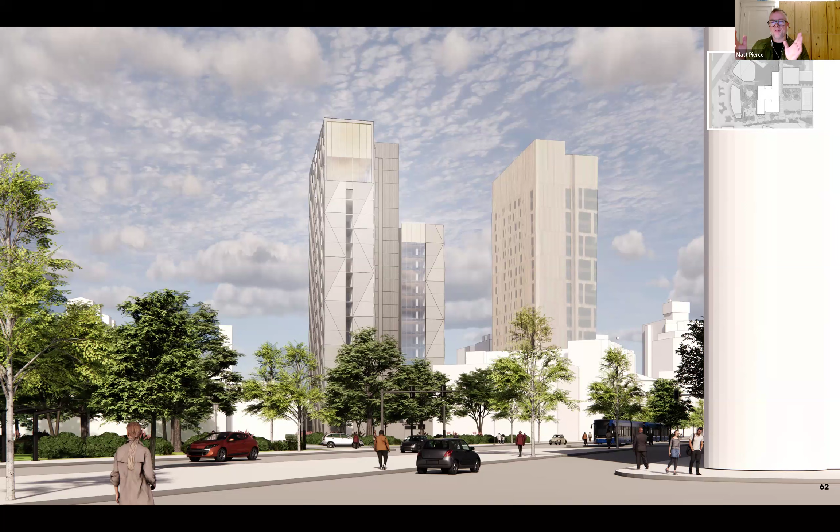We've always, from the very beginning, thought about how are these things going to be in dialogue on the skyline. The idea of having the predominantly colorful treehouse on one side, and then this one that kind of inverts the color - it's more neutral, but has accents of color versus being the majority of it being color. So there's hopefully a nice dialogue between those two on the skyline.

But to your comment, Commissioner Eastley, I think we do have a little bit of work to do on the kind of center element here. And I think also recognizing that this is the side of the building that will not get the raking light - the south end will get much more vertical light than the sides, but this side will not have that kind of characteristic to it. So that's something we'd definitely be looking at further as this evolves.

It's tricky because you don't have a place to put a good back door or back facade, right? You don't have a back of house. You don't - and so you have this building in the round, and this happens to be the view that I'm concerned about because it's your most public view from Huntington. So what cleverness can you incorporate to maybe minimize the idea that we're looking at the stair core and maximize the sculptural quality, or draw your eye back to where the student rooms will be anyway?

Yeah, well, I think in some of the views we had in the previous meeting, where we had a few views moving along Ruggles, you see it sort of as your perception shifts. So this is one particular point of view - you're actually looking kind of diagonally because you're right, I see that on the map. Yeah, so when you actually move to the left to the other side of Huntington, for example, or along Ruggles, you're going to see kind of both facades at the same time.